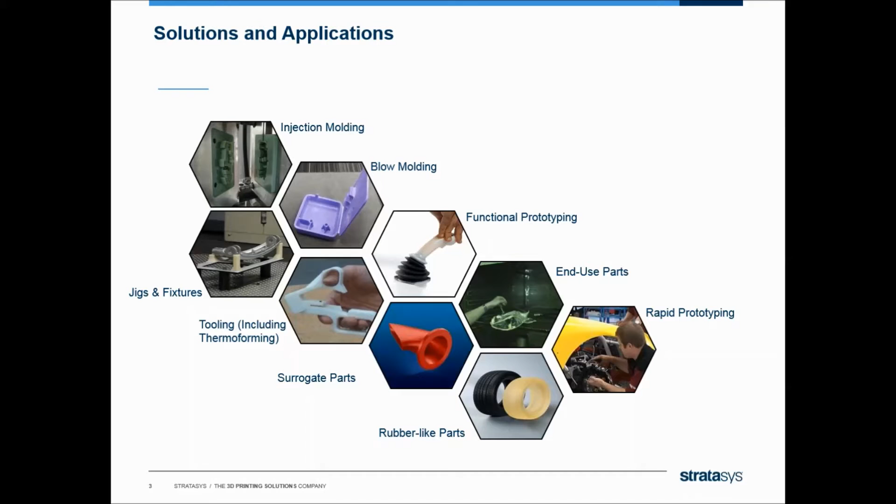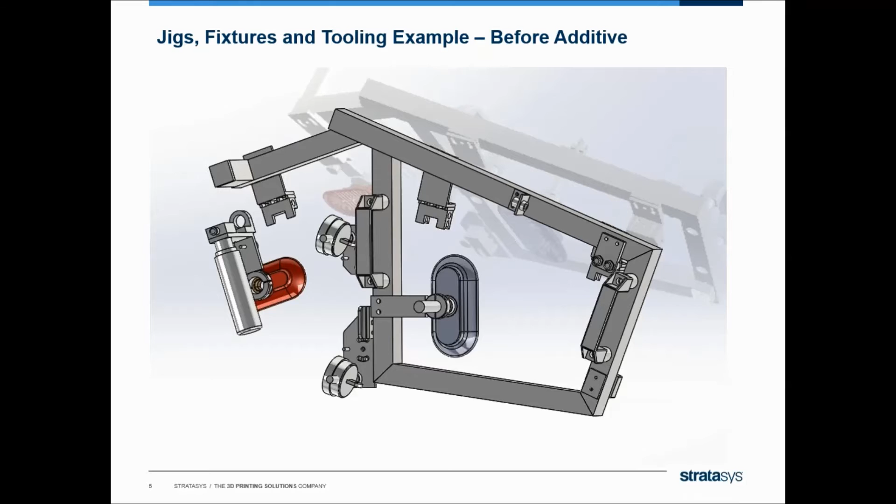I'll start out with jigs and fixtures and tooling. What you're seeing on the screen is a typical automotive fixture made out of aluminum. You can see all the complicated angles and really kind of a crude design that just gets this thing into the hands of the production workers. The specific function of this fixture is to align the two glasses in the car so they're lined up perfectly with each other. The aluminum fixture weighed about 12 pounds, was very difficult to manufacture, had a lot of problems with it - you see the hoses flying all over the place - and was difficult for the operator to actually use.

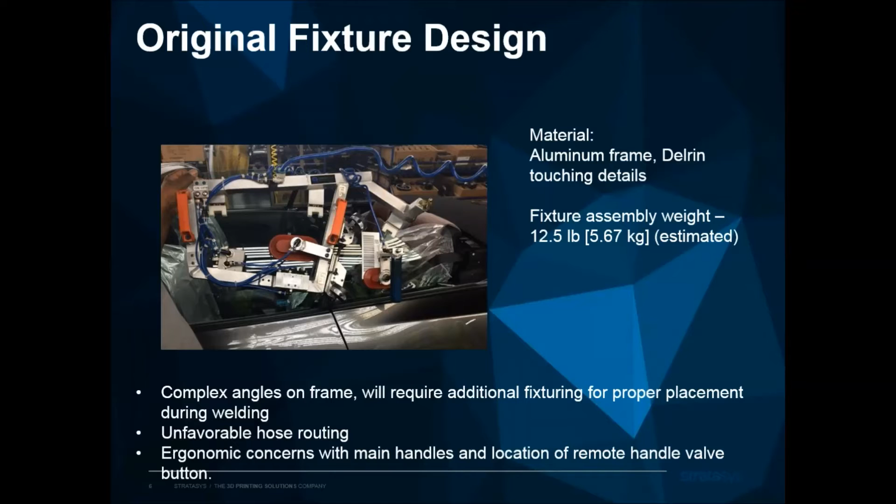So this automotive OEM and Stratasys collaborated to come up with a new design based on additive manufacturing production as opposed to traditional methods. You can see already just from the difference between what you have here and what you have there, there's a much more ergonomic design. All the hoses are contained inside of the fixture itself. It's much more easy for the operator to use, much more accurate, less fatigue out on the line when they're using it, and already they've come up with three or four ways to make this thing even better.

So just a few numbers here: this fixture would probably cost about $5,000 to make, left and right side. With the material used and the cost we did with this fixture, about $1,600, and we were able to get it on the line about a week after we got the original data to do the redesign.

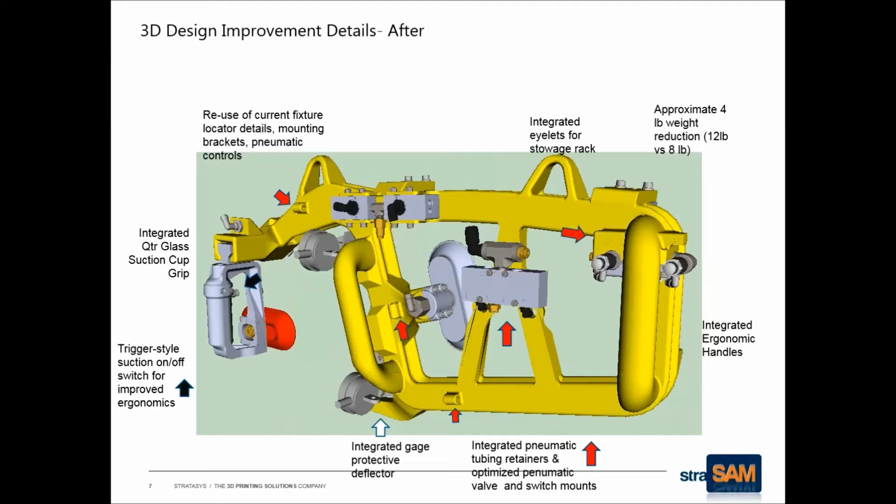There's also a high degree of integration of standard components. All the suction cups and gauges and everything you see there are the exact same ones that were on the aluminum fixture. So we're actually designing it to protect some of that hardware, to integrate it, but there was no reason to order anything special for the additive fixture. You can see the actual picture of it there.

They let us take it off the line so we could take a better photograph of it. But you can see the weight savings, the time savings, and the cost savings.

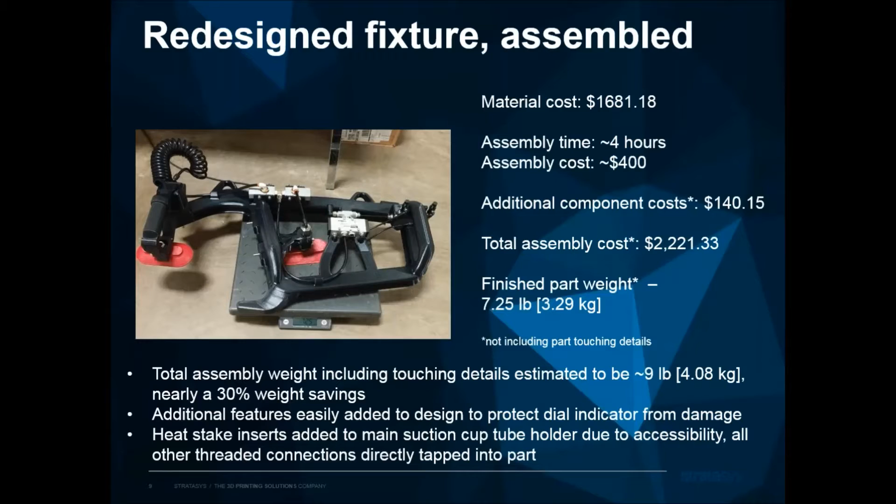That's what's really got the automotive industry excited, because they spend a lot of money on these kinds of tools, and it adds a lot of lead time to get an assembly line up and running, or if you're going to make changes on the line or retrofit a line. These are the kind of things that add time and cost to get a new model through the production line. So we call it the next frontier, really, of additive and automotive.

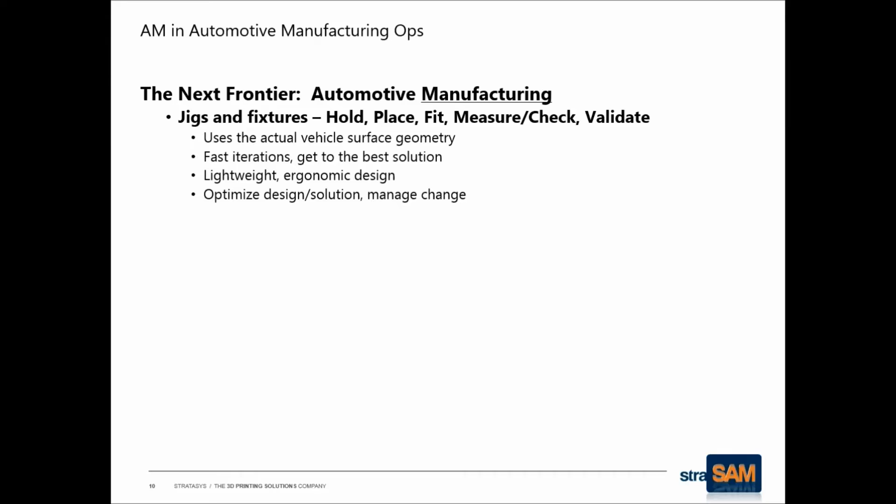Jigs and fixtures to hold and place and check and validate. I'm not sure who's on the line here, but I'm sure that all of you out there have dealt with jigs and fixtures if you're in any kind of manufacturing operation.

And the original fixture that they used was plates of aluminum. They were heavy. They were not ergonomic. They were able to design something like this. And as I'll mention later, with 3D printing, complexity has no bearing on the cost of producing the part.

You can see this is a tool that helps attach a bumper to the BMW, and you can see again the integration of electrical and mechanical devices inside the complex geometry of the 3D printed fixture.

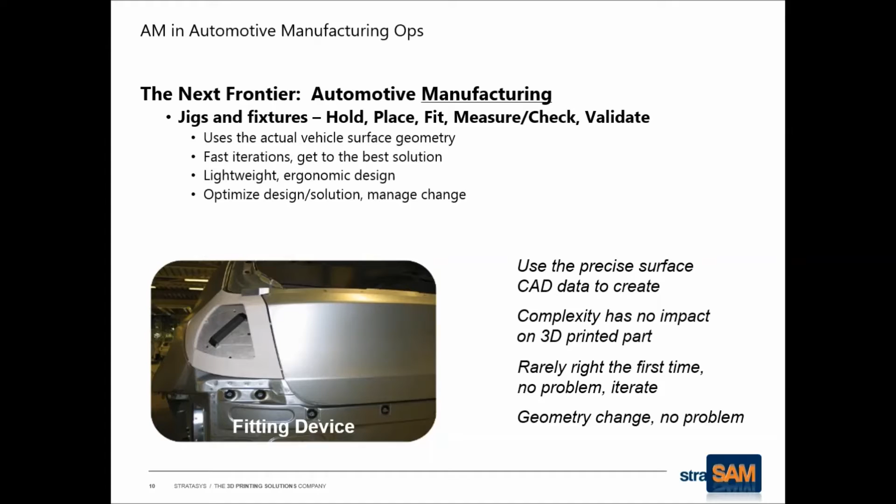Things like fitting and cubing devices, and what happens out on the line is somebody comes up with a better idea. With the 3D printer in the plant, they're able to produce another fixture, another version of it, and by tomorrow they've got an even better fixture running on the line.

Here's another example. This isn't strictly automotive. This is from one of our customers, Polaris. You see on the right there, this fixture is clamping a firewall for a snowmobile.

What they found out was when they were shooting these parts in the injection mold machine, which was a very large, very expensive machine, they had to leave it in the machine longer than they wanted to, because if they put it out too soon, it warped.

So someone had the idea, as their production ramped up, the managers are thinking they have to buy another injection mold machine because of the cycle time, and they figured out if they printed a fixture that you see there on the left, very complicated geometry, optimized for this job, they pull the part out of the mold or the injection mold machine much quicker, clamp it in a series of these fixtures, and they're ready to shoot another part.

The fixture holds and keeps in place the integrity of the firewall and doesn't warp, and that saved them a lot of money in not having to buy another machine. But you can see from that geometry, if you had to machine that or cast it, it would be very expensive to actually make that fixture.

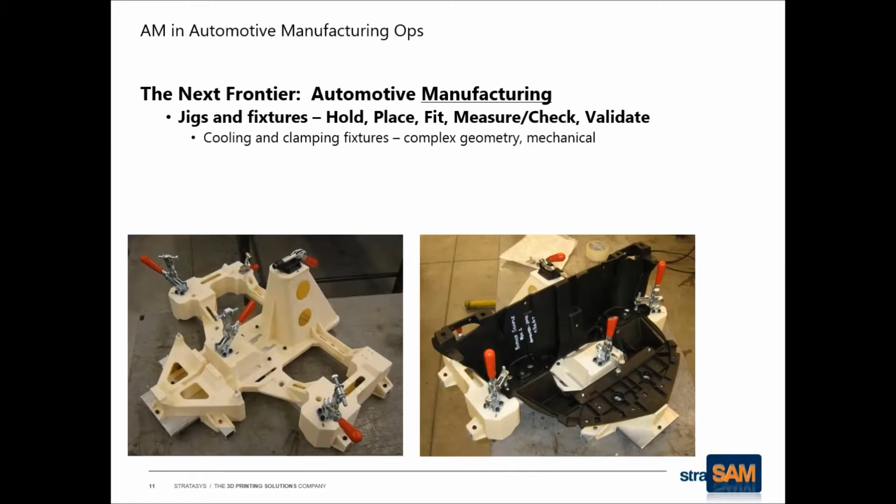Here's some other inspection gauges. There's a lot of things that come in from suppliers that need to be checked really quickly to make sure they're fitting, or if they're not fitting on the car, to figure out whether or not it's the actual piece or something wrong with the car.

There's a lot of this kind of fixturing being 3D printed now. You can see the complexity of the geometry. It's got to fit exactly to the sheet metal parts that you see there, and we're able to do that very quickly with 3D printing.

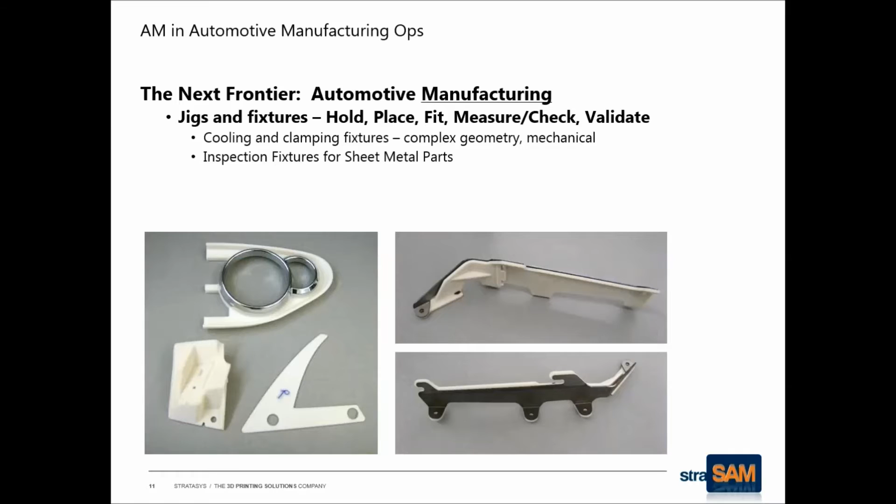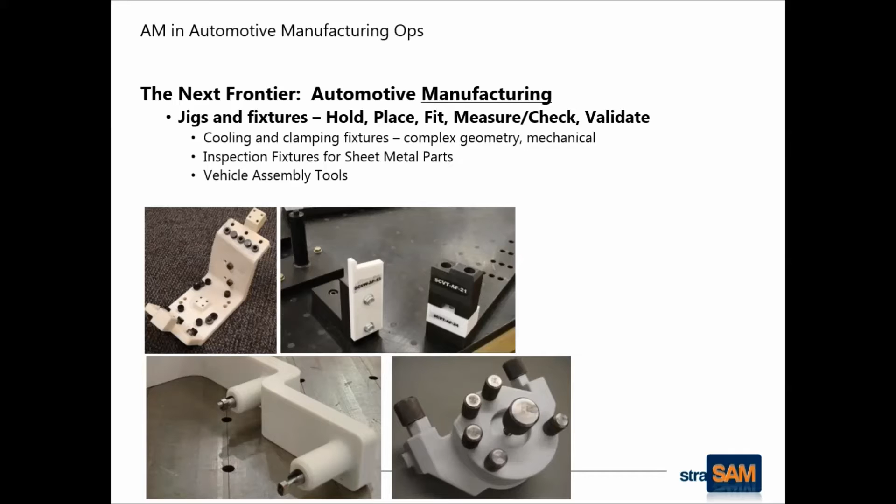All kinds of different vehicle assembly tools. I can't even tell you exactly what these do, but you see them all over automotive plants, and more you see them 3D printed. Here's another fixture for checking, complex check fixtures. That's a very expensive fixture to make if you're going to make it out of aluminum and machine it. And they were able to optimize the design and 3D print it very quickly and for much less cost.

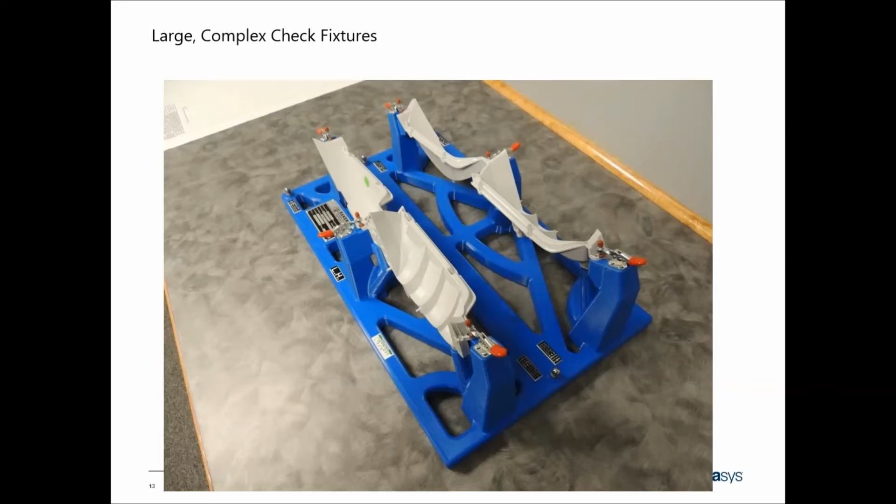Some of the other things that we're doing is thermoform tooling. One of the benefits of a 3D printed FDM part is that it's porous. So you can make a fairly complicated thermoform tool, vary the porosity, which we have the capability of doing, and allow very quick manufacturing of tooling that will run on a thermoform tool.

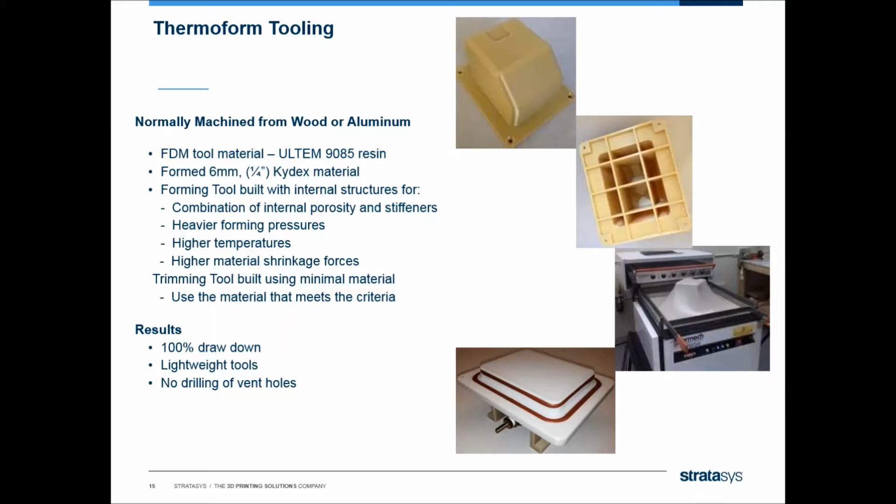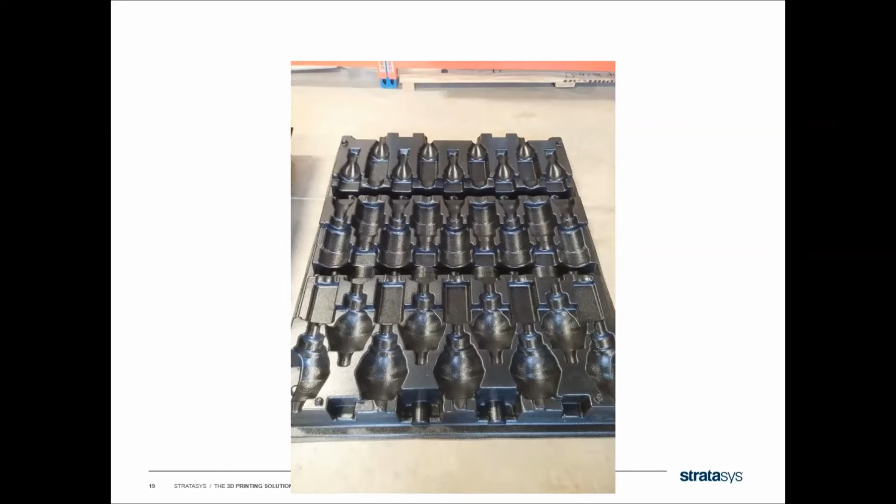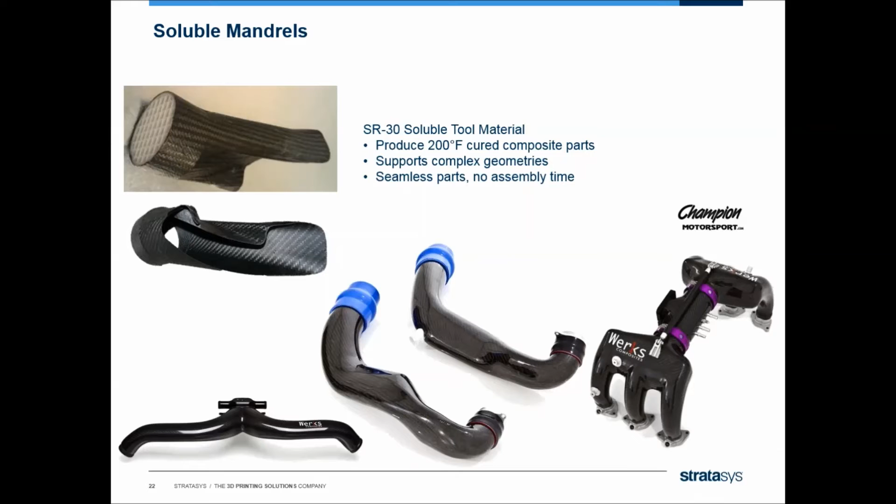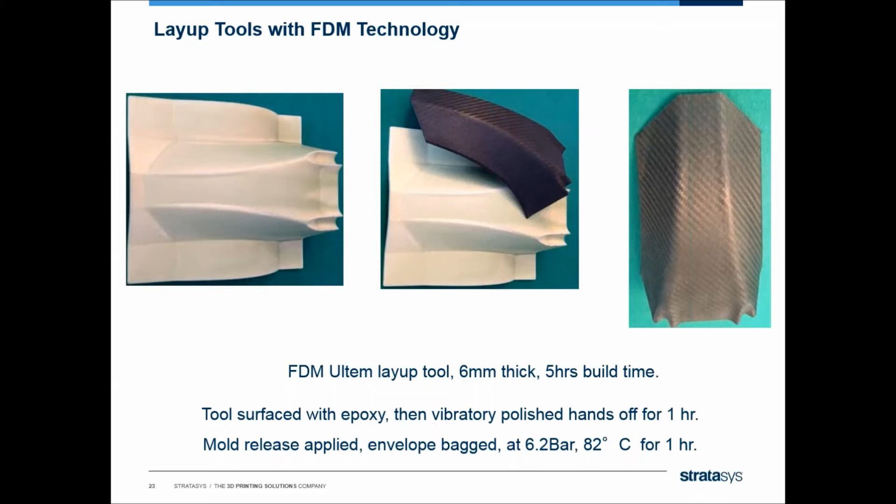Also, layup tools for composite materials - this is just a small example. Some of you may be involved in layup tools. You can print layup tools very quickly in our FDM technology, and some of our more advanced materials will stand up to the autoclaving that has to go on after. We've been very successful with it, especially in the aircraft industry, but also now more and more in the automotive industry. So that's the jigs and fixtures side of the equation.

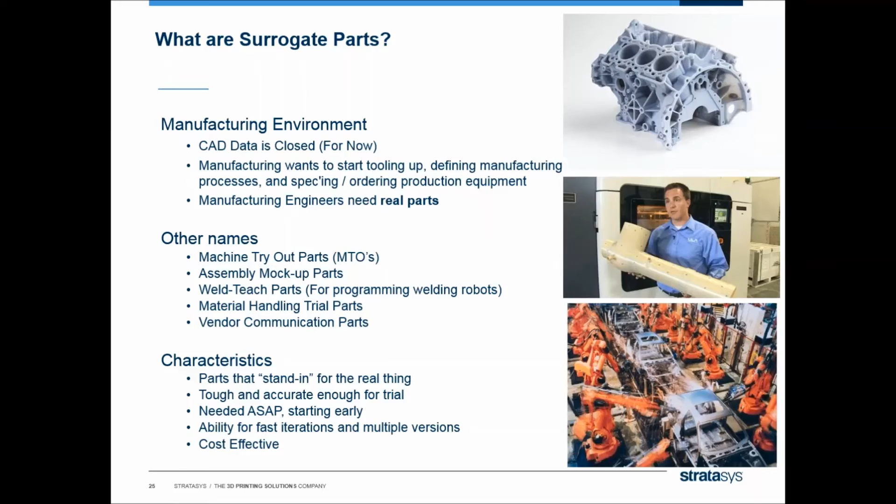I also wanted to talk about surrogate parts. People often ask me, well, what do you mean by surrogate parts? Surrogate parts are parts that go into the plant for setup before the metal parts are available, or to alleviate the expense of making metal parts. You see a casting there, and you also see sheet metal parts down at the bottom for welding. Some of the OEMs call them MTOs, or machine tryout parts, but the idea is to get parts into the plant well in advance of the plant having to go into production.

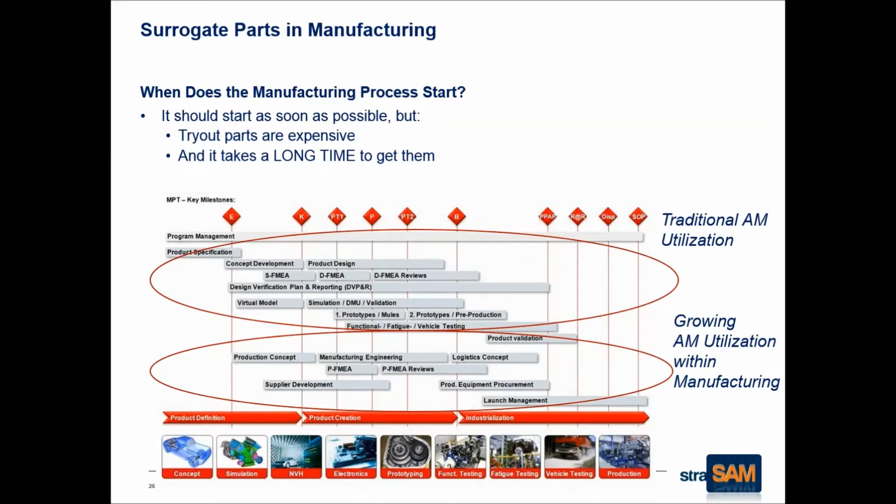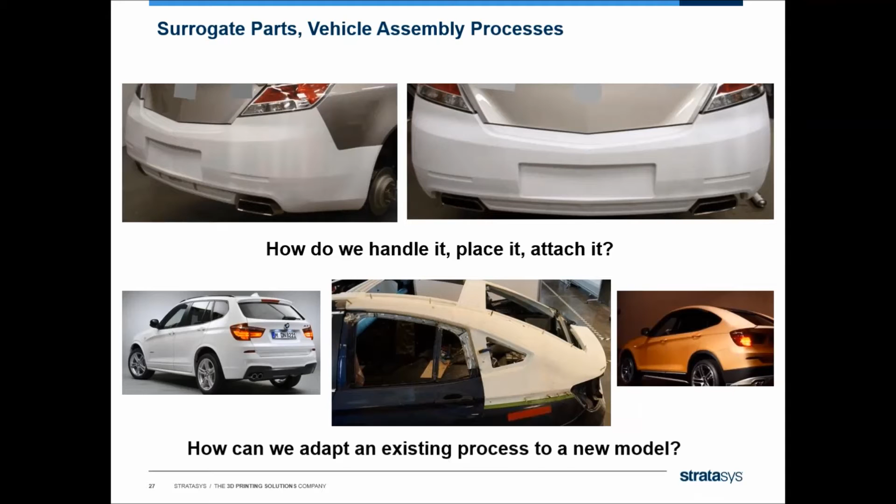As soon as the engineering side is done with something as complex as an instrument panel, the plant can print it and start lining out their manufacturing processes, solving problems way before they become an issue when the metal parts are available.

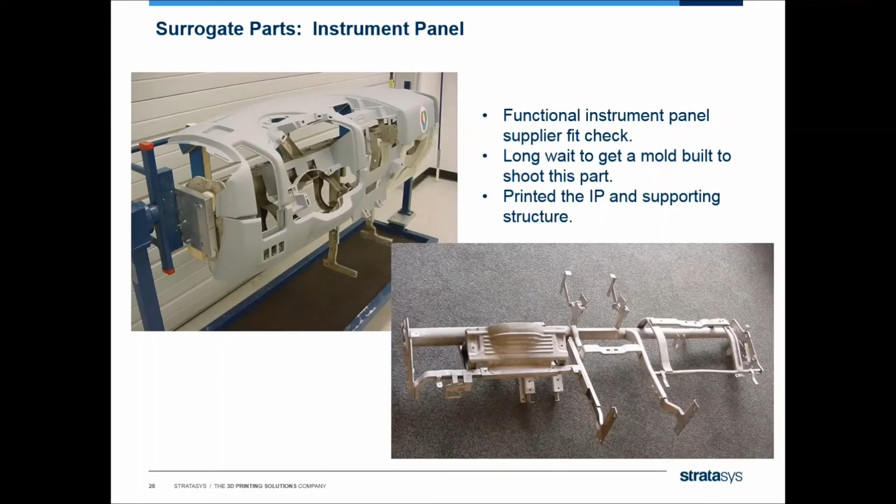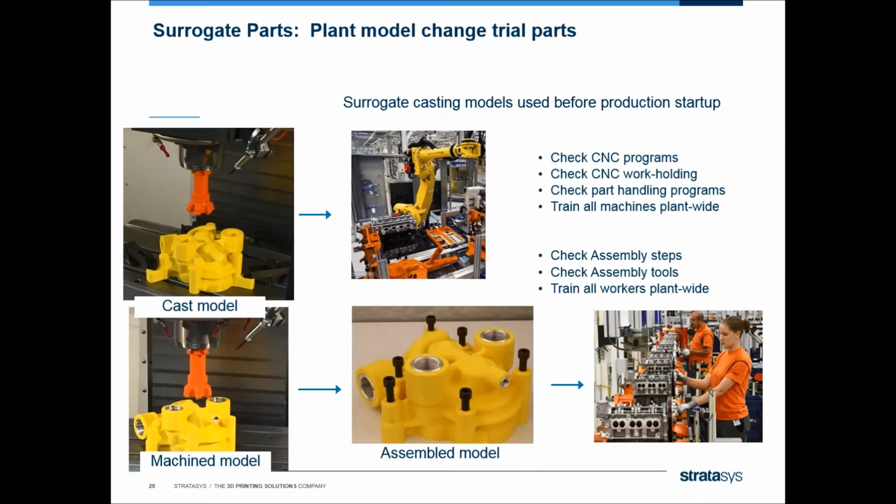If you see a robot there, some of our customers print the casting model in two pieces and fill it with weight so it's mass accurate, so the robot is actually lifting something that weighs and is shaped exactly right, like the production piece. So I talked about machining centers.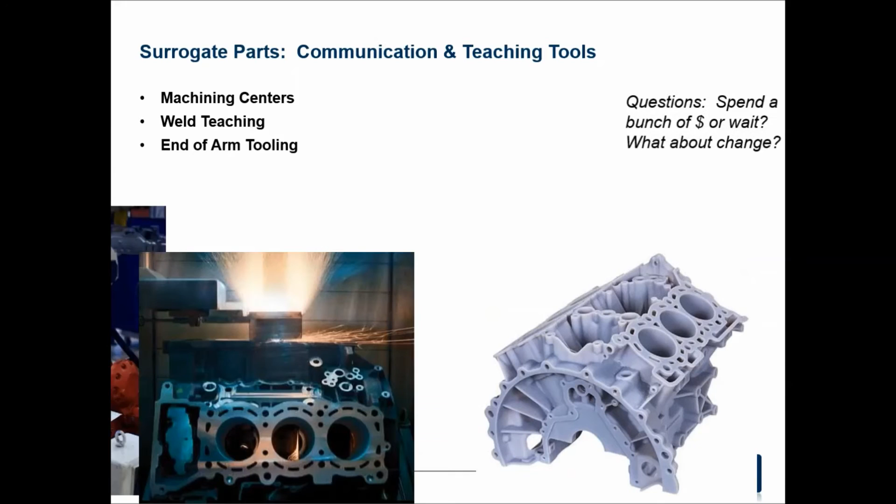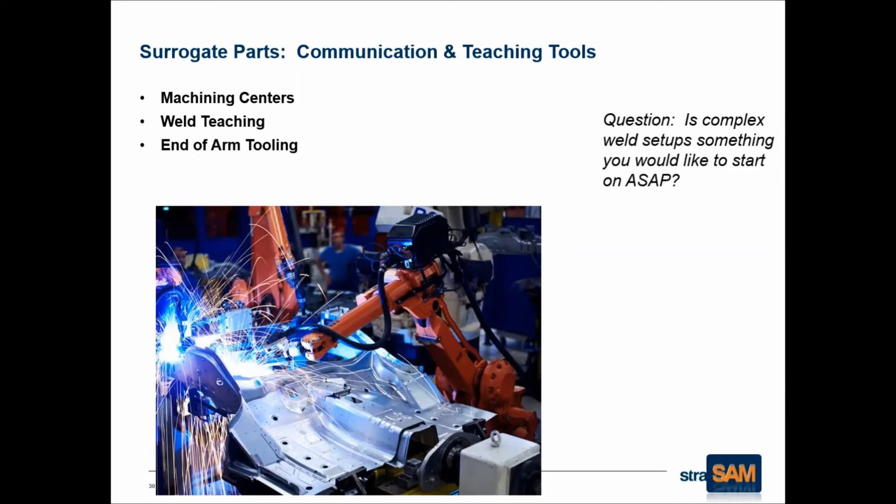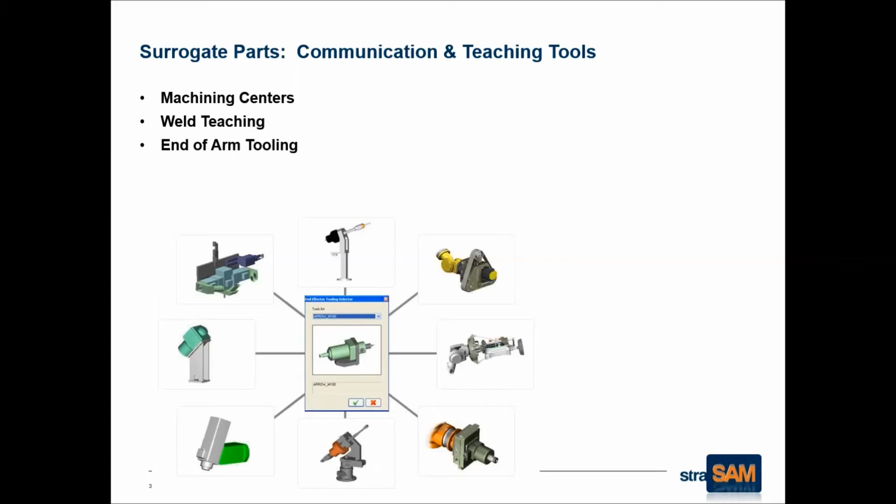It's pretty obvious with the castings. One area we've really been doing a lot of is weld teaching. Some OEMs are actually printing floor pans and entire upper body structures months in advance of those being available in metal, so they can teach their welding centers, which is very complicated, and anticipate and work out problems before the actual parts hit the plant. You can also print end-of-arm tooling when doing weld teaching, so you're not breaking or damaging expensive tooling that may not even exist yet.

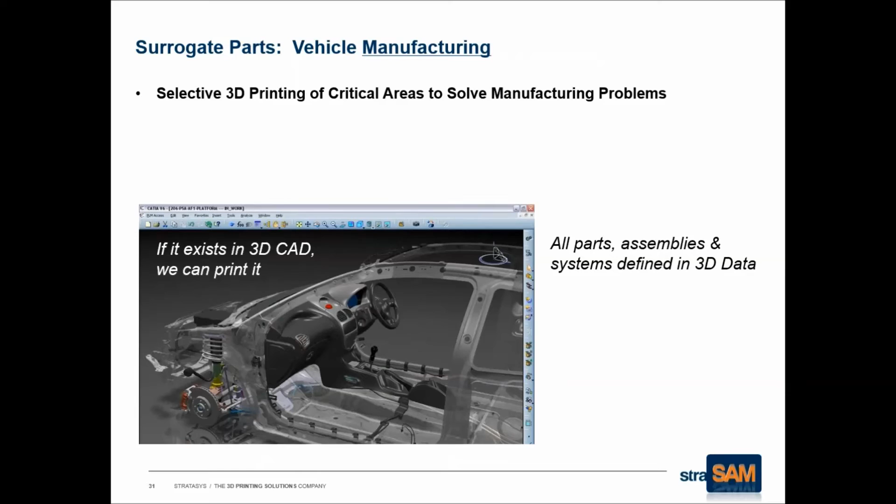You can check how that works at the end of the robot. I show this graphic because often there are problematic areas of the car. If you look at the back of this vehicle, there's a fuel door on the back quarter panel with a hose that goes down through the car into the gas tank. We've had people cut that part out of the car in CAD, print it, put it on a stand, and practice installing the hose to see what problems will come up in production.

Really, this applies to any part of the car where you think you might have manufacturing problems. One of our OEMs had a lift gate they couldn't figure out how to seal in CAD - a problem they'd been trying to solve for 6 months. Engineering and manufacturing sat down together with a 3D printed model of the lift gate, and in 2 hours they figured out how to do it.

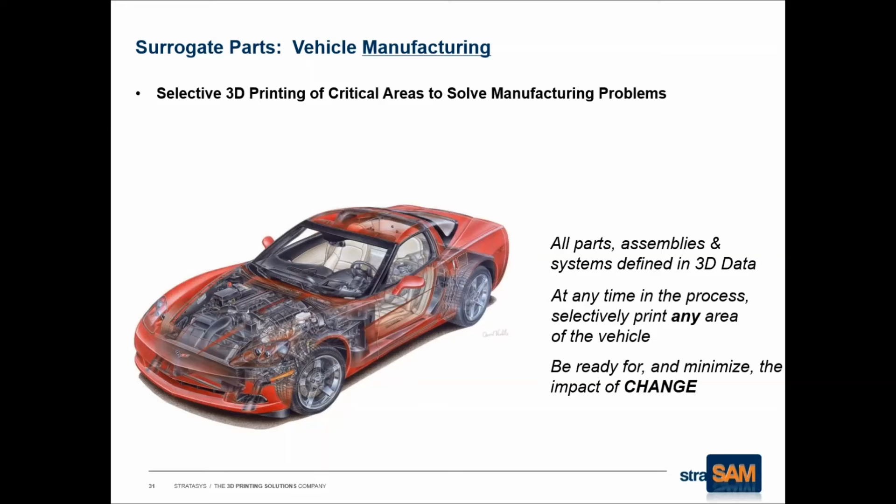Finally, I'm talking about packaging. Packaging systems are becoming something a lot of automotive manufacturers are focusing on. They build expensive trays to move parts around the plant, and with 3D printing they can print whatever part needs to be moved well in advance of the metal parts being available, so they can start planning their packaging.

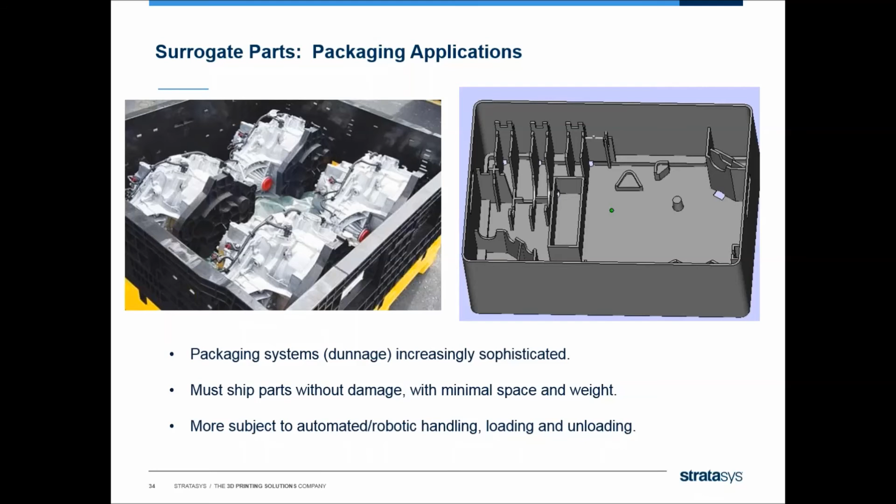Here's another example with the CV joint. You've seen this tray before earlier. They actually made the tool for this tray, but even if they don't make the tool to do the thermoforming, they're 3D printing a lot of their parts so they can do the packaging planning.

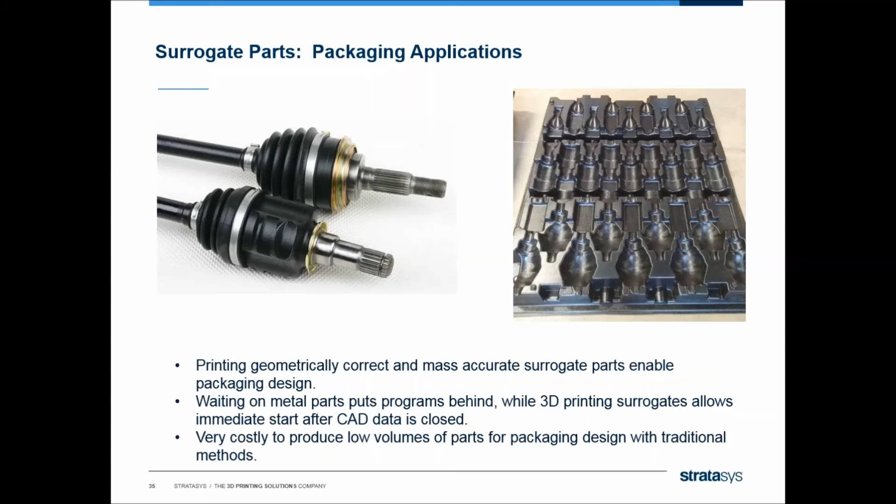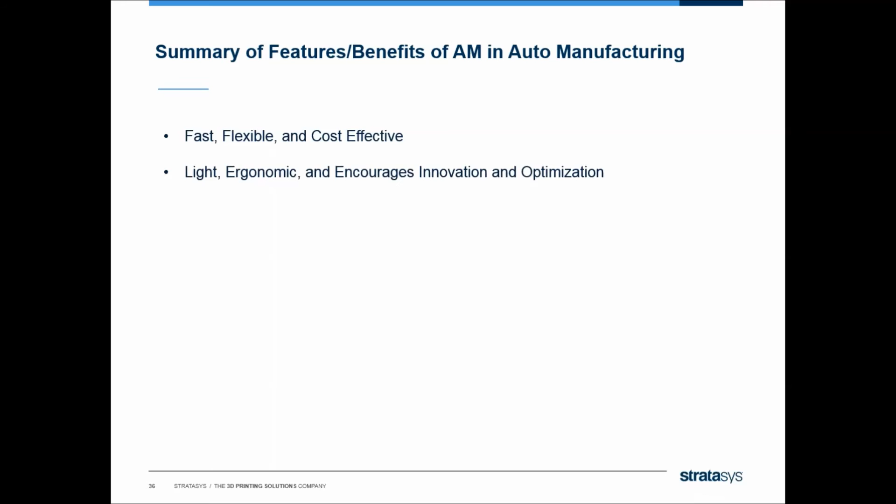So just to summarize some of the things we've talked about, additive manufacturing, 3D printing, allows our automotive customers to make tooling, jigs and fixtures, gauges, all those kinds of things very fast, very flexibly, and very cost effectively. These new designed tools, because of the freedom you have with 3D printing, are lighter, more ergonomic, and it encourages innovation and optimization of these tools.

So I always wait for this bullet point, because a lot of you are thinking, well, we can't 3D print a lot of the tools that we have in the plant, and you're absolutely right. There are some tools that have to be metal—either it's a striking tool or it's carrying the car down the assembly line. It goes beyond the capability of plastic, and we're not saying every tool in the plant can be 3D printed. We're looking for that percentage of tools that are complicated geometry.

With new materials like the Ultem material I described before, and all our nylon materials, you'd be surprised at how strong and how much weight and impact these things can absorb, especially if they're redesigned for additive and not just copied from the metal design. So as we add new materials to our product line, it also expands the envelope of what is possible to 3D print and be effective in the manufacturing processes.

And the ROI on something like this—like when I showed you that first example of the quarter glass alignment fixture in the beginning—the ROI was very powerful on that, and the reason we helped them with that one was to prove how much time and cost they could save.

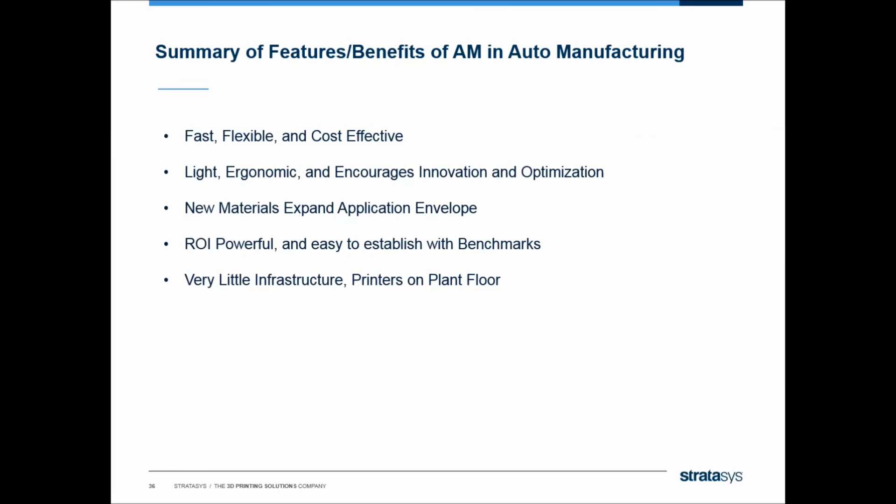And once we print them, to clean up the support material is basically setting it into an agitated tank, and the support material that you need with 3D printing melts away very quickly, and you're ready to use the part.

Accuracy, durability, repeatability—all of those are hallmarks of Stratasys 3D printers. FDM, fused deposition modeling, by its nature prints with thermoplastics, especially those large parts that are open structures like bumpers and body panels. It's by far the most accurate and repeatable way to print some of those parts.

As well as tooling—if you're going to have a gauge, it's got to be accurate, it's got to measure correctly, and you might have to make 7 or 8 of them. You want them to come off the printer exactly the same way.

Minimum post-processing, as I said—very easy to clean these parts once they come out of the machine and get them ready for use. And then we've got some new software that is making our 3D printers even more intuitive to use.

A lot of people have said to me, well, our guys are doing other jobs in the plants, they can't become 3D printer experts. And you'd be amazed at how quickly and how easy it is to pick up how to use the software.

These printers are designed not to be some science project that you have to calibrate and constantly babysit. They come out of the box ready to use, and the operator does not have to be an additive manufacturing genius to get these things to work. We're constantly trying to make the ease of use and learning curve shorter and shorter.

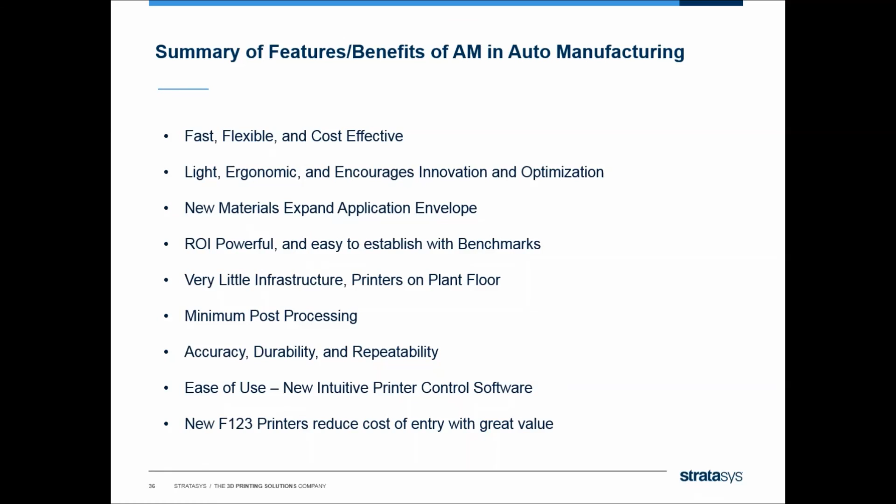Just while you're maybe typing those in, George is just south of the border, so he does get up to Ontario quite a bit—Windsor, Toronto, Kitchener, Cambridge, London, Waterloo. So if you are in automotive and you would like to learn a little bit more and do that with some of George's expertise, that is something we're able to organize.

John, I'd like to add to that—we're very excited about what we see happening with the automotive industry in Canada. I've been in the automotive industry my whole career, have spent a lot of time in Windsor and Toronto. The automotive OEMs like Honda, Toyota, Ford, GM—there's a lot of OEM plants in the Windsor and Toronto area, and I've actually been up to Alliston a few times in the middle of winter with John and Doug from Javelin, and they're all making use of this technology.

Like I said, our goal, especially in Canada where there's so many automotive suppliers, is to get people to understand how the OEMs are taking advantage of this technology and how it might benefit a supplier.